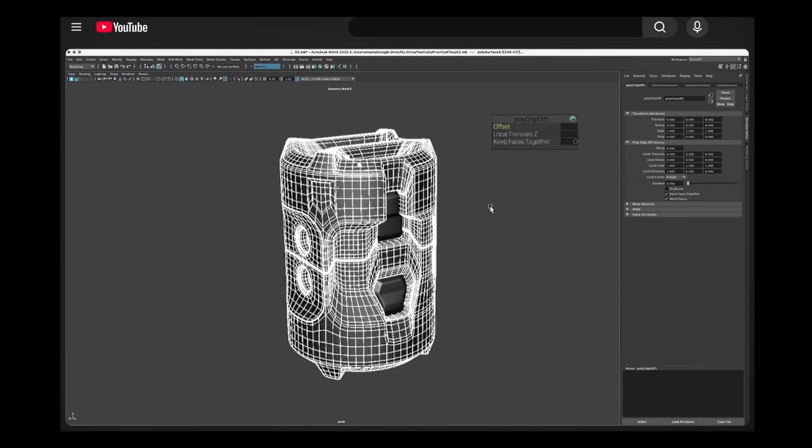If you want to make custom electronics, you kind of need to be an expert at 3D modeling software, spend lots of time learning the advanced interface and tools, not to mention the circuit board software and all of its complex designing of schematics and PCB layouts, and somehow you need to make this all fit and work together.

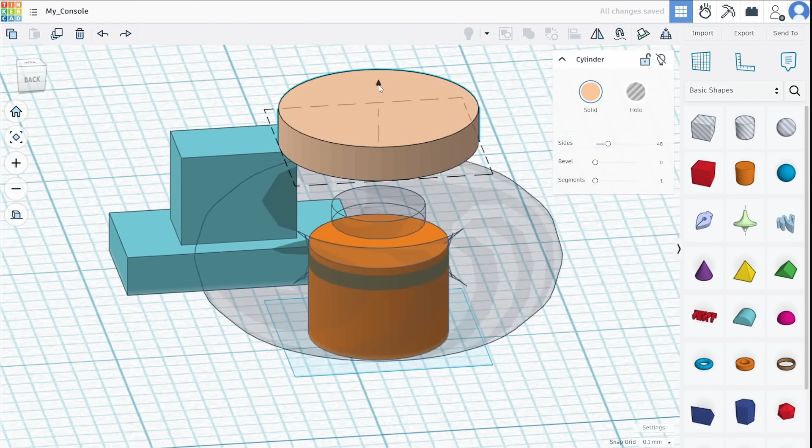But what if there was a simple way to convert a PNG image into a PCB? And 3D modeling was as easy as adding or subtracting primitive shapes together in a non-destructive way, and all of this could be created in one program. This is the method I have discovered, and I can't wait to show you.

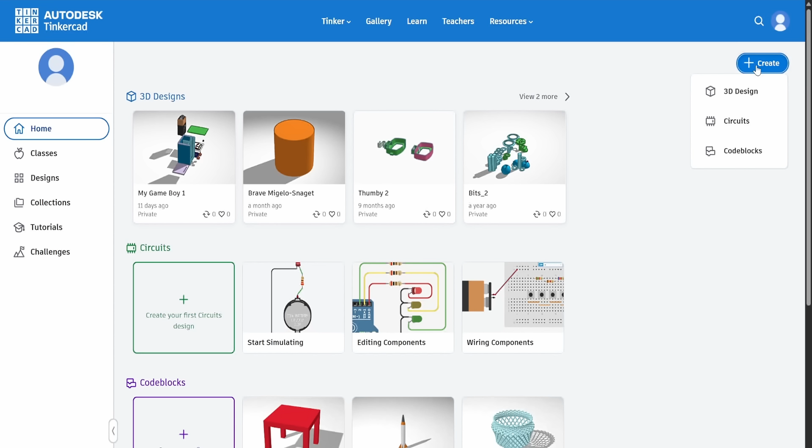If you are intimidated by 3D modeling programs, I highly recommend Tinkercad. It's free, simple to use, and is designed with 3D printing in mind. I recommend starting simple by editing the dimensions of a shape by dragging or entering values.

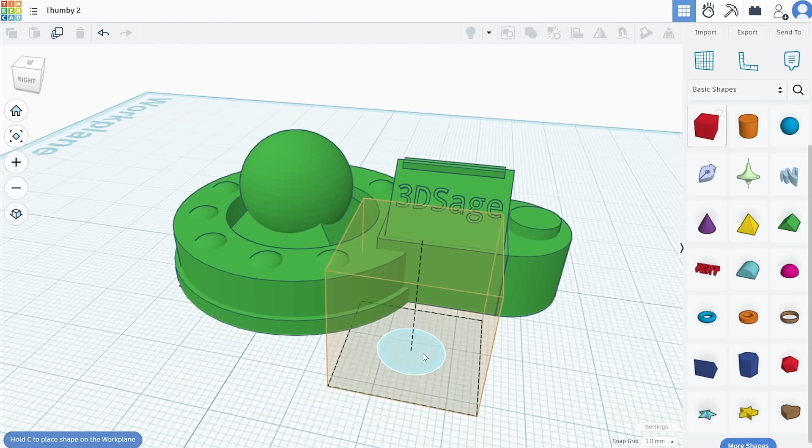All objects can be a solid or a hole, and they will correctly join together when grouped. And those groups can always be opened, values edited, and then regrouped back together. And even a large group of shapes can be joined, cut, and have this repeated over and over while still being able to go back and edit.

I've used this process to create a few of my old projects, and Tinkercad has several pre-made adjustable models too. I like how simple the tools are and easy to use, like rotating with the mouse outside the circle or inside to snap angles, and many of the shapes have adjustable properties. You would be surprised with how easy it is to create most anything by using these simple tools.

And then when you're ready, export as an STL, import into your slicer program, and then send to your 3D printer.

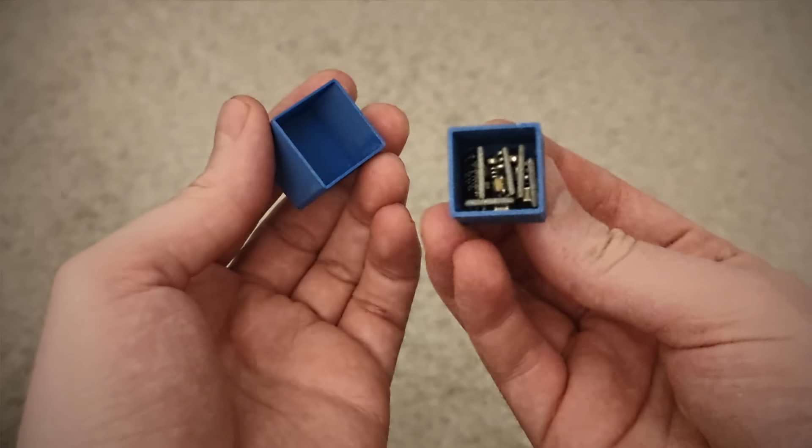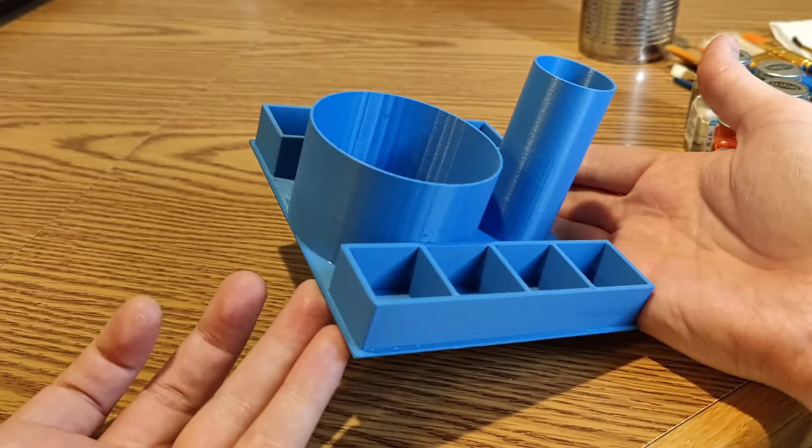Turn your ideas into helpful, functional items. Use a caliper to accurately measure your items. It becomes very satisfying to use this process to design your own custom storage containers, and it's hard not to smile at the things that you make.

While I create my own PCB enclosure, I want to show you a challenge you might run into. You probably want a rechargeable battery, a power switch, a USB-C charger board, and a way to regulate that voltage. And these components need their own board on top of your actual board with its components.

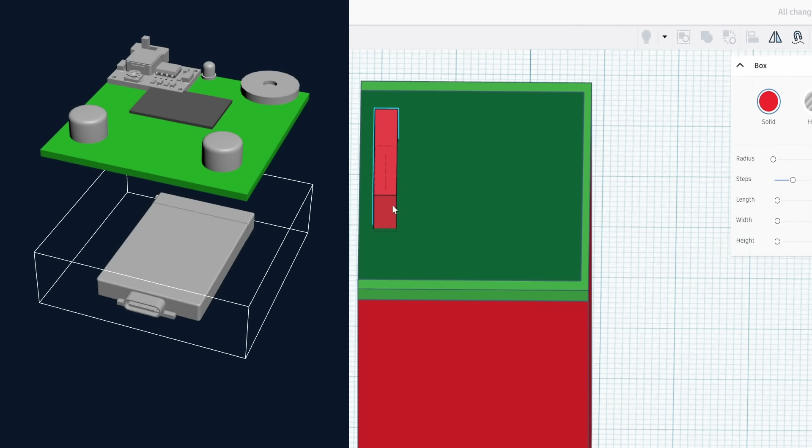So I found a way to easily combine the charger and battery to make the design more compact. I found these 9-volt rechargeable batteries with many great features: 1300 milliamps, built-in USB-C charging, and best of all, built-in safety like overtemperature and short circuit protection.

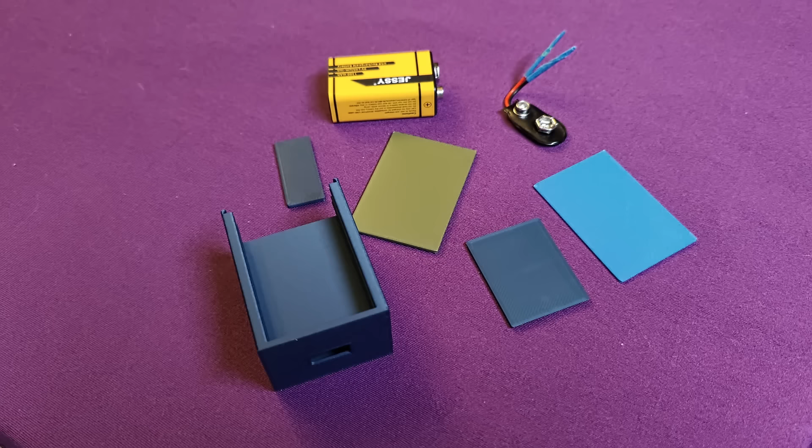So here's my finished electronic enclosure, and I'll also want to create a box for my PCB and the front cover too. It's really helpful to 3D print and test fit the pieces, and make adjustments if needed.

And I added this spacer to lock in the battery, and I can adjust its height for a taller enclosure. Thanks to the USB-C charging port, you never have to open it to change out the battery, but you could swap out the battery if you need an instant recharge.

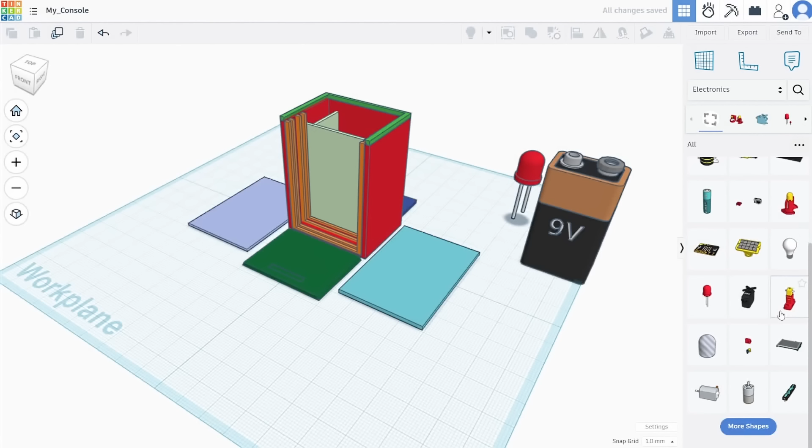Tinkercad has a lot of built-in electronic components, and for anything you can't find, I recommend GrabCAD. They're all free models usually saved as a STEP file, which Tinkercad can't import, but it's easy to find a free online browser converter that will save it as an STL. It's so helpful to be able to move the parts around to see how they fit and how you want to arrange them. Now, this is important.

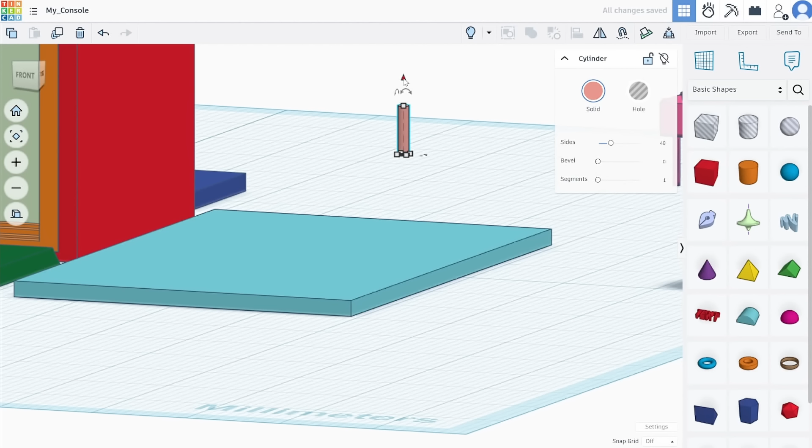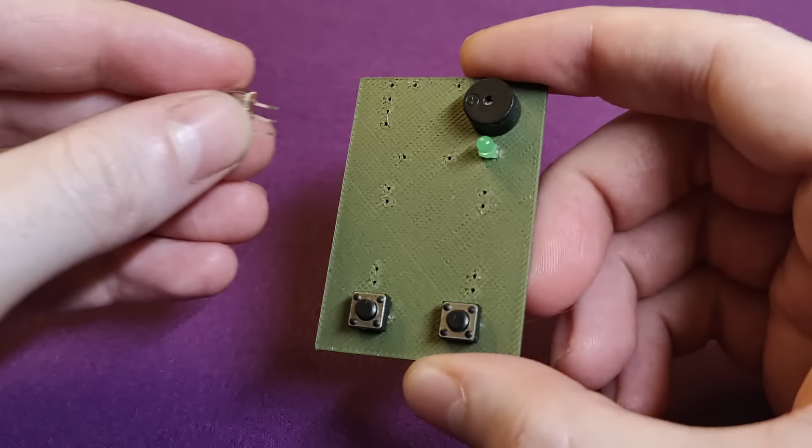I'm going to make the drill holes a solid red color, and the board will be pure white. This will make sense very soon. The components will help you align the holes to where they should be, and from here you have two helpful options. Option 1, you can 3D print the components to see how the layout feels. Or option 2, you print the board with the holes and insert your own components.

So I'll capture a screenshot to sketch out the trace routes. Alright, let's see. My power will come into the switch, and then into the buck converter, and then out to the main ESP32. Alright, that's good. And then we'll do the same thing for the negative route.

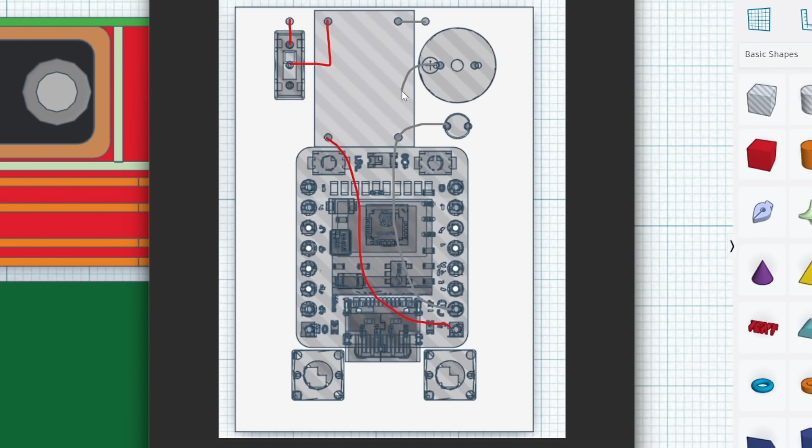I can connect the negative poles of the LED and speaker, and same for the two push buttons, to the negative pole. That's all the power, so what's left to connect is the output pins to the components, and I have a finished layout I can test on a breadboard.

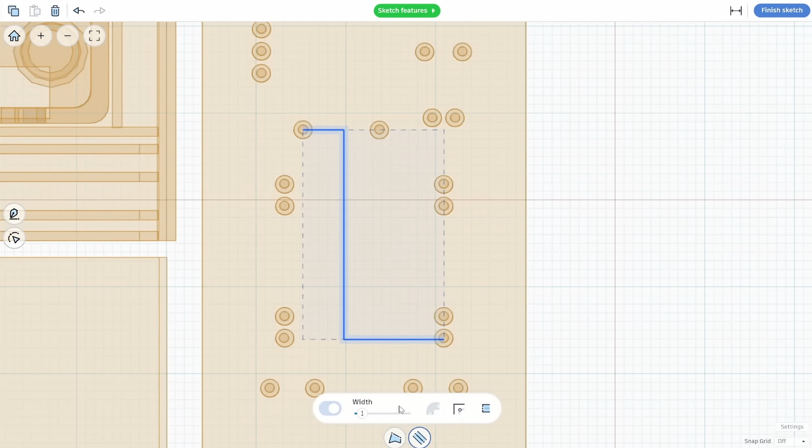Next step is to add the large pure black cylinders around the red ones, and we can use the sketch tool to draw the lines in the same way we sketched it out earlier. You can then end the drawing with the check mark, and I'll go ahead and set the width to 1 millimeter. You can always go back to edit the points if needed.

And you will now see the shape in 3D. Make it pure black and lower the height. I'll repeat this process for the rest of the lines. And you will see a faint ghost line that we want to remove by grouping all the black shapes together.

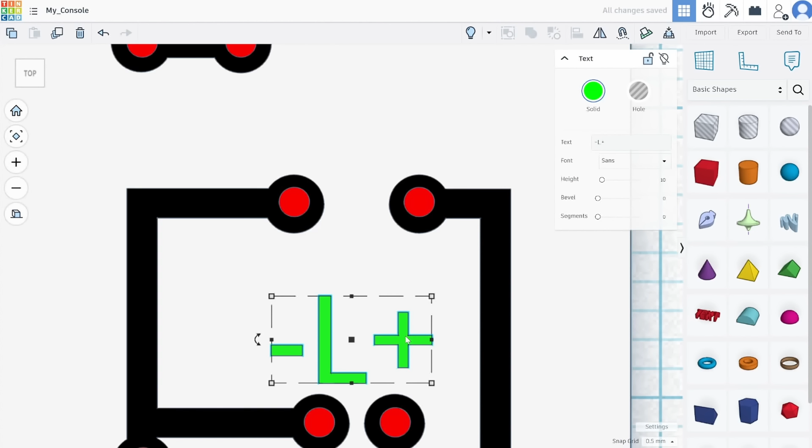This is going to make sense very soon, but next let's add the pure green text to help us remember the polarity direction of our components. The text cannot overlap the traces in this example, or it might cut the connection. And we now have a finished board completely designed inside Tinkercad.

Let's rotate to the widest direction to screen capture a PNG image. Use any program you like to crop out the black outline and rotate it if needed.

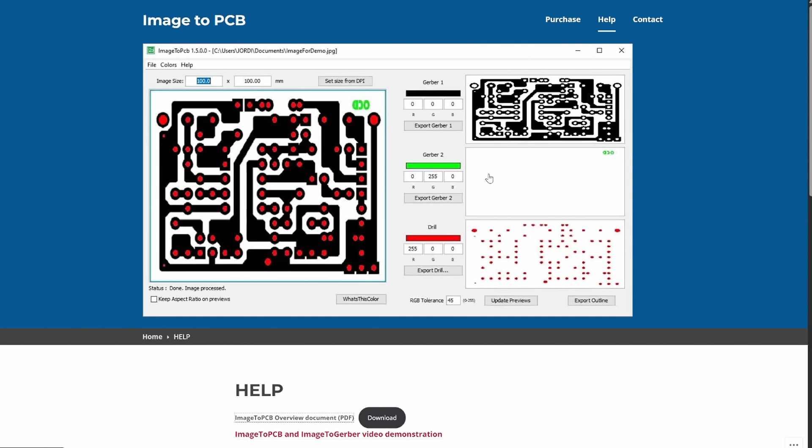So the secret and magical tool that we're going to use to convert this PNG image into a PCB is called Image to PCB, properly named. It is a paid software, but it's able to separate the colors into traces, silkscreen text, and drill holes. I found this very helpful, and I haven't seen anything else like it. So there's no complicated PCB CAD software needed, and you can always edit the image to update the design.

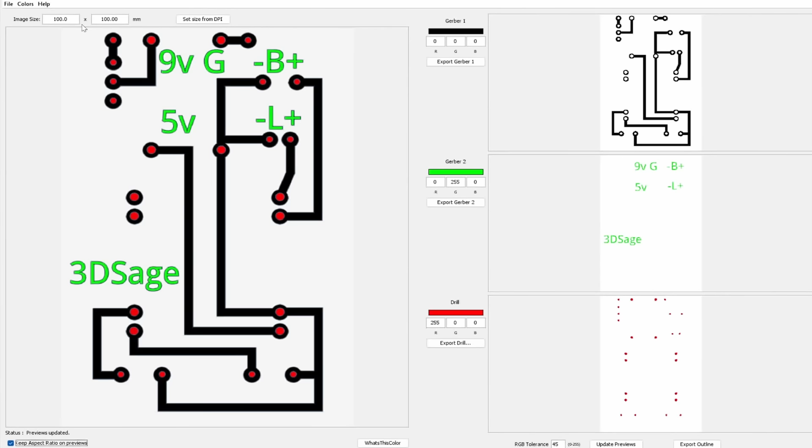So here's what I do. I import the image, I keep the aspect ratio, I enter my board dimensions. So you can see the program found all the black pixels that we can export as T for traces. All the green pixels are the silkscreen, we're going to label S, and you can export the outline as O, and it must be square or rectangular.

And I'm really impressed with how it understands drill holes. It recognizes similar sizes and visually groups them by color. So the black holes I made just a little bit smaller than the red. It will add more colors for more diameters. And it did its best to guess the diameter, but I will update with the values that I want.

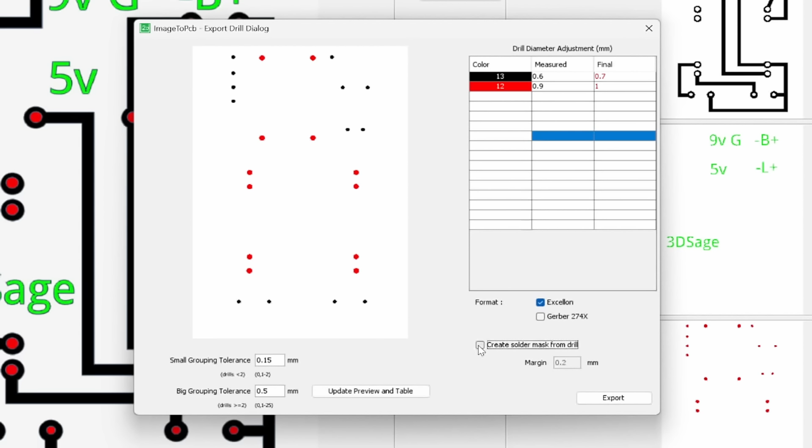I'll add a separate solder mask file with an offset of 0.2 millimeters. And JLC recommends changing the file extension so it imports correctly. So here you can see what to edit for each layer.

I'm using a Windows machine, so renaming is super easy by creating a batch file, which is just a text file with the BAT extension. Just click the batch file and boom, I automatically have the files correctly named.

Now just add the files into a zip folder. We can now go into the JLCPCB website and upload it to see how it looks. I personally like the 3D view the best, so I can spin it around to view it from all angles.

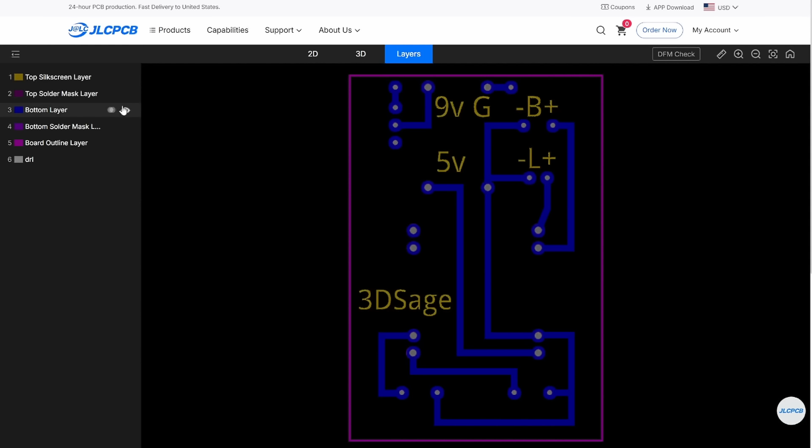I wouldn't worry about the pixelation caused by image to PCB. In my experience, this is impossible to detect after it's manufactured. I also like to hide the solder mask to make sure there's no breaks in the traces. Looks good to me, so let's send it to be manufactured.

So I want 10 boards, 1.6 millimeters thick. It costs a little bit more, but I want mine to be lead-free. So the current price is $35, that's $3.50 per board.

That's okay, but I can lower it by choosing the cheaper and slower shipping. Now it's only $1 per board, and ordering a larger quantity can lower that price per board even more.

JLCPCB does a great job showing the progress updates. I also highly recommend shopping around for components. This same ESP32C3 component I found for $7, for $3, and then finally for $1.30, and it's all the exact same component.

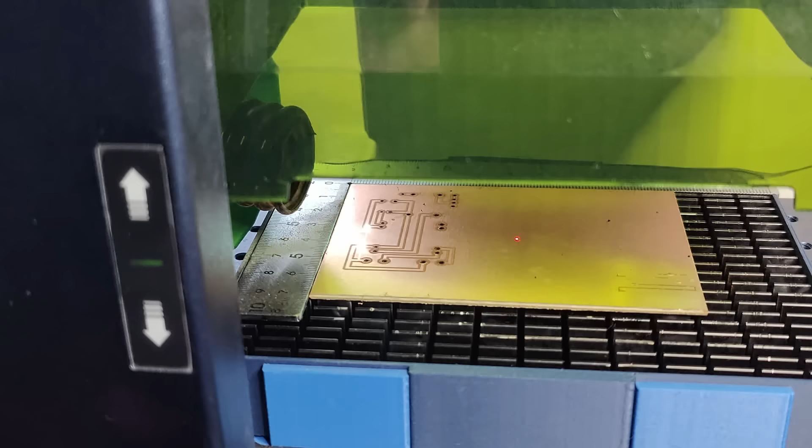This next part is not part of my tutorial, but I want to share with you how great a laser engraver is to carve the traces, drill the holes, cut out the board, and even clean the board so you can quickly make a working prototype.

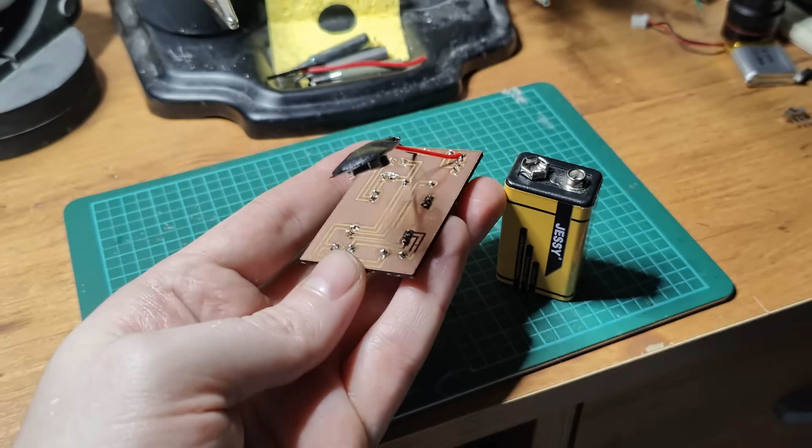But this copper is not protected or safe for production quality, and laser engravers are expensive, but they are dropping in price, so I just wanted to quickly mention it as an option. But back to the main tutorial.

This time, I'm going to choose the more expensive shipping, just for my knowledge and for you to learn about too. I don't want to pay this much, but I will for this video because I want to learn how fast it can arrive.

Now let's look at the results from JLCPCB. The slow shipping arrived in exactly 2 weeks, or 14 days. And the more expensive shipping arrived in half that time, exactly 7 days. Of course, your results may vary, but these are my results.

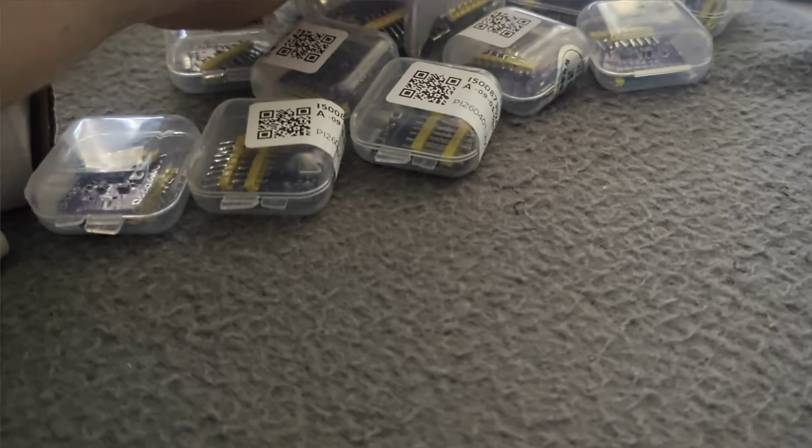Let's take a look at how the boards turned out. The text, traces, and pads all turned out really nice and clean. It's nice to see that these traces are well protected compared to my laser engraved prototype.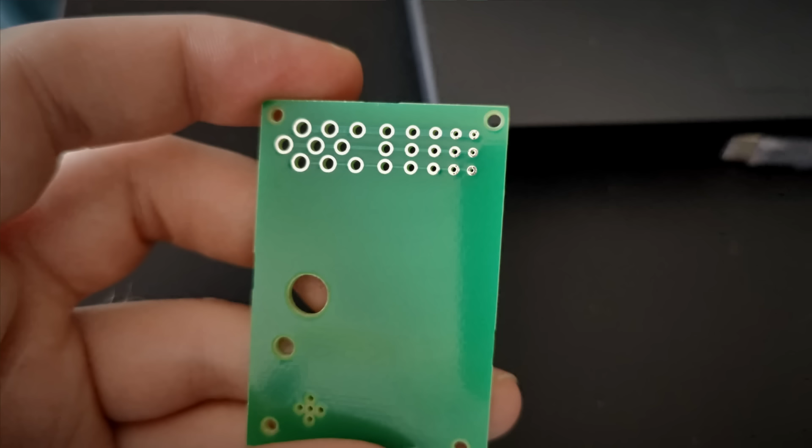The test board is great to find the perfect hole size for any of my components, and the measurements were very close and accurate to the original 36 by 53 dimensions.

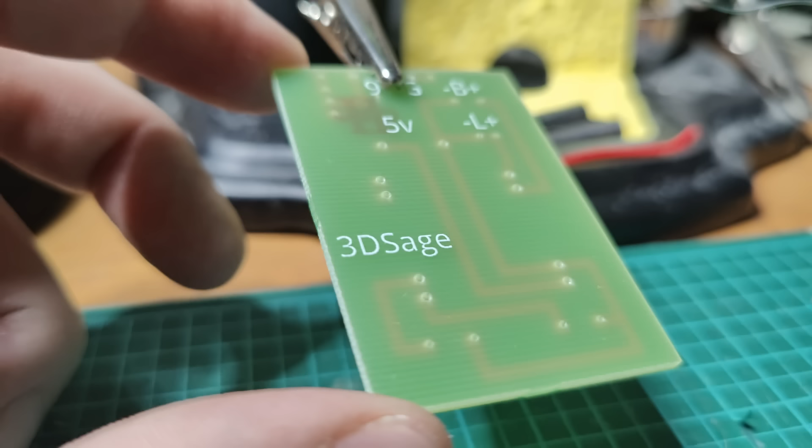When soldering, I tried to keep the temperature around 375 Celsius. That works better for the lead-free option I chose. I try to heat both the pin and the pad at the same time for a good second, then hold for a couple seconds with the melted solder for a strong bond.

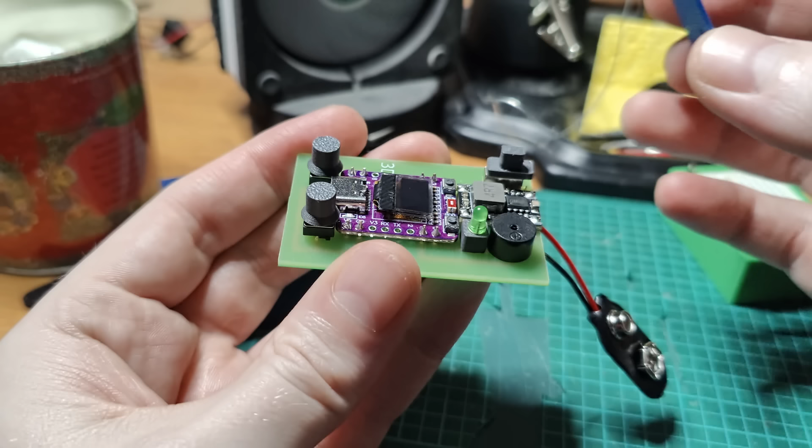All that's left to do now is program my game, upload it, close it up to play and enjoy. I have no words to describe the feeling of converting your idea into a tangible, functional device, so I highly recommend that you just give it a try.